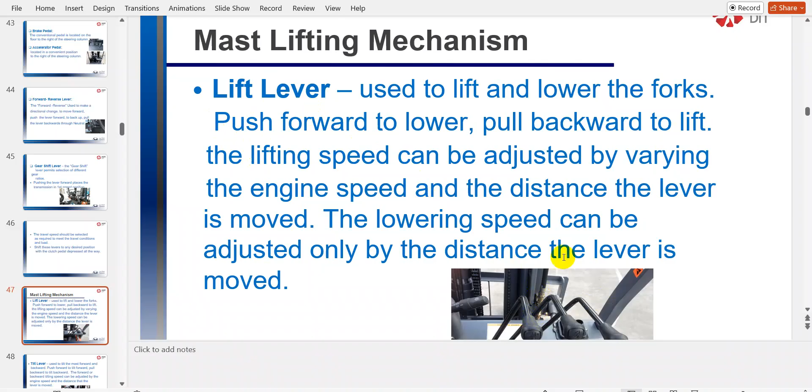Mast lifting mechanism, lift lever. They have lift levers, these are lift levers, and they lift the mast. Lift levers are those levers used to lift and lower the forks of the forklift. Push forward, and you push these levers forward, they lower the mast, and you push it back, it lifts the forks.

Now its speed depends on the length, on how much you push it forward or backward, depending on the distance from their mean point to forward and backward. When you push it forward too much, the speed will be higher, and if you push it slow to a lesser point, it will lower the speed.

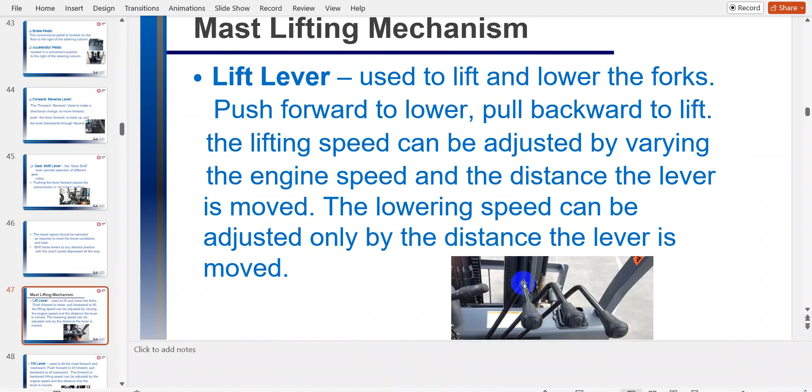Now, tilt lever. Tilt lever is the lever which is used to tilt the mast. It helps in smoothly and safely lifting and lowering the load. Tilt lever used to tilt the mast forward and backward. Push forward to tilt; when you push it forward, it tilts forward, and you push it backward, the mast tilts backward. It's also the same, depends on the speed, depends on the movement length.

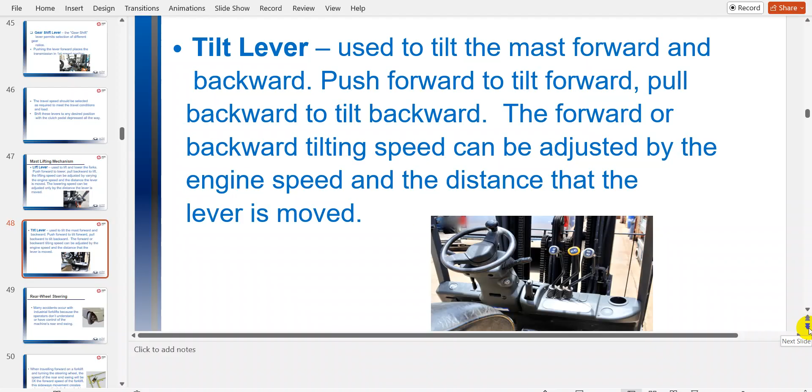Now, rear wheels. Rear wheels are steering wheels. Many accidents occur with industrial forklifts because operators don't understand or don't have control of the machine's rear end swing. Like in normal vehicles the front wheels are the steering wheels, but in forklifts these are the rear wheels. So many accidents also result because many operators don't understand or don't have any control over them.

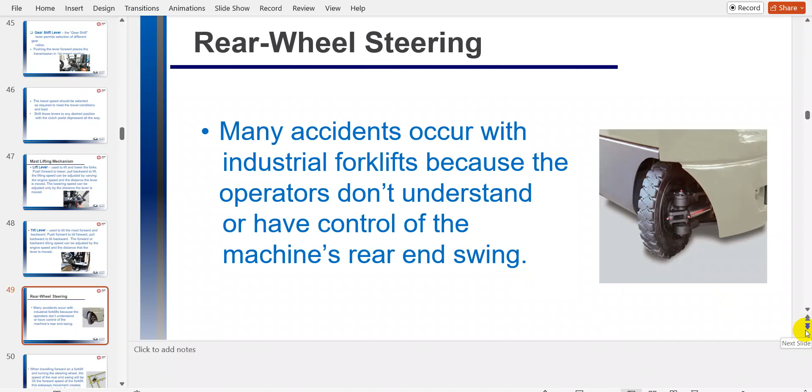Now when traveling forward on a forklift and turning the steering wheel, the speed of the rear end swing will be 3 times the forward speed of the forklift.

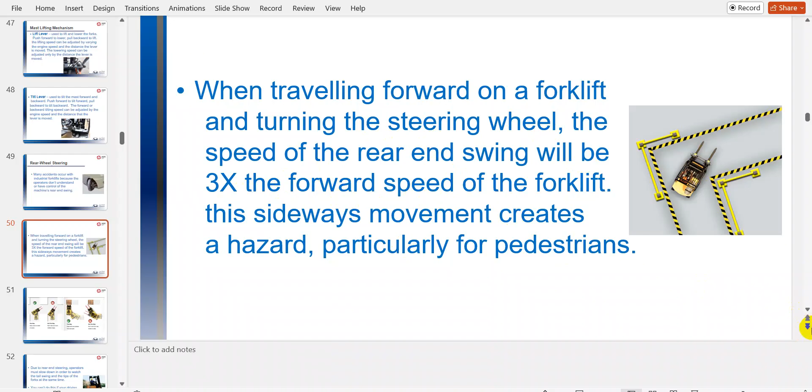Now these are the ways which are correct and which are not correct. So this way, when you keep this distance lower, it will move easily and safely. But if you just park like a normal vehicle in between, it will collide here.

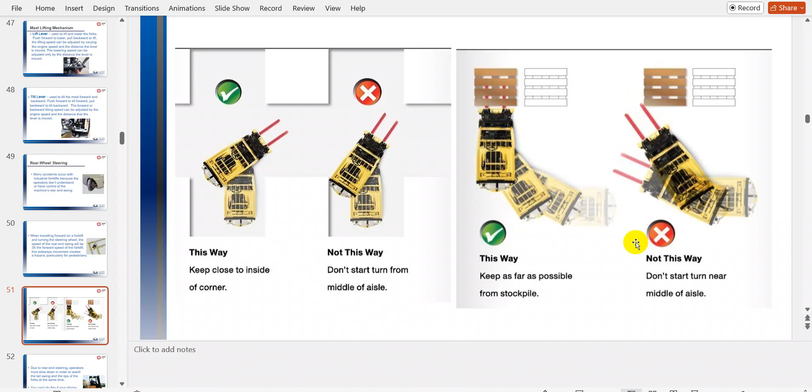Also, while lifting any pallet you have to be very careful. When you come closer to the pallet and want to lift it, it will collide here. But if you want to lift it safely, you have to balance the forklift with much distance, and then you just go straight and lift it easily. It will be safe for all of the mechanisms.

Due to rear end steering, the operator must slow down in order to watch the tail swing and the tips of the fork at the same time. Because the steering wheels are rear, you have to be very careful, and you have to just watch and must be slow before lifting or balancing the wheels and forks of the forklift. You can't do this if driving too fast, but if you are at fast speed, you can't do it at all times.

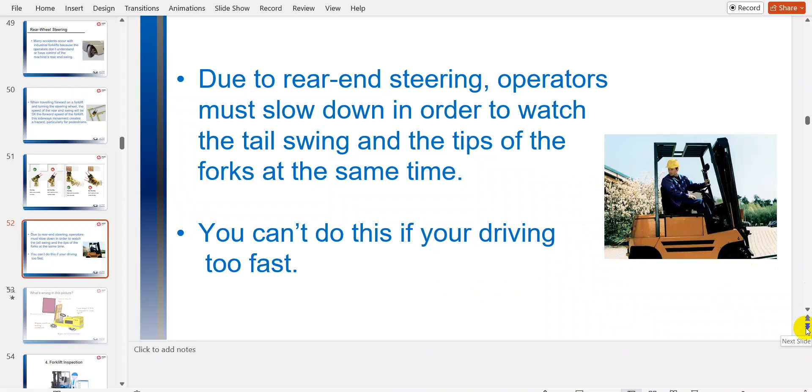Because you have two things to manage: you are balancing the forks and you are looking backward. But if you are slow, you can do it easily. If your speed is high, you'll make mistakes.

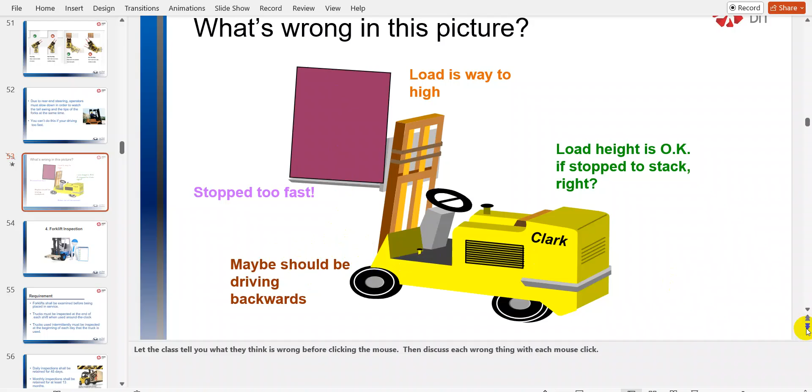Also, you have to slow down, and you have to keep this load lower to the earth here, so it will make an equilibrium, it will make a balance, and it will protect the forklift from lifting or flipping.

Now, forklift inspection, the 4 point - we will inspect.

How will we inspect the forklift? It's a very important thing. As an operator, you have to inspect it. The forklift shall be examined before being placed in service. When you want to place the forklift in service and work in it, you have to examine it before.

The truck must be inspected at the end of each shift. While in each shift, you have to inspect it, when the shift changes - day shift and night shift, etc.

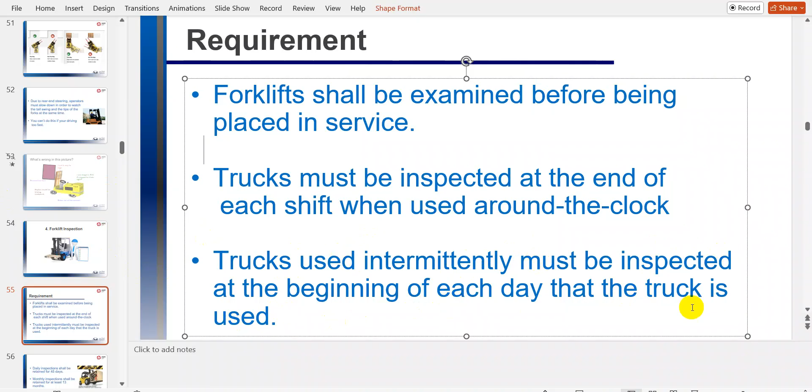Truck used intermittently must be inspected at the beginning of each day the truck is used. When the truck is used, you have to check it daily. Daily inspection records shall be retained for 45 days - that's 1.5 months. Monthly inspection records shall be retained for at least 13 months.

Here are some checks: inspect the forklift before operating. Operate a forklift only if you are trained to do so. Drive slowly and never raise or lower a load while moving.

While you are moving, don't move the forks up and down - keep it lower. Never raise or lower a load while moving. Don't carry anything on the overhead guard, and stop at all intersections and sound the horn, to be safe and keep others safe.

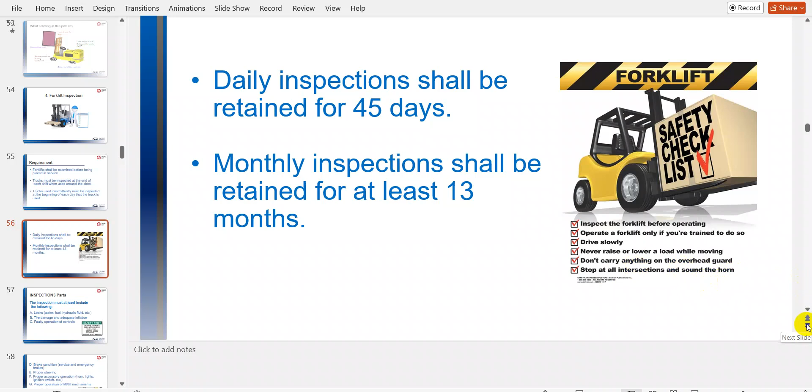Inspection part: the inspections must at least include the following - leaks. You have to check leaks in inspection, including water leakage, fuel leakage, hydraulic leakage, etc.

Second, tire damage - you have to check whether the tires are damaged or okay, and check adequate inflation. Now, faulty operation of controls - you have to check for faulty operation and controls.

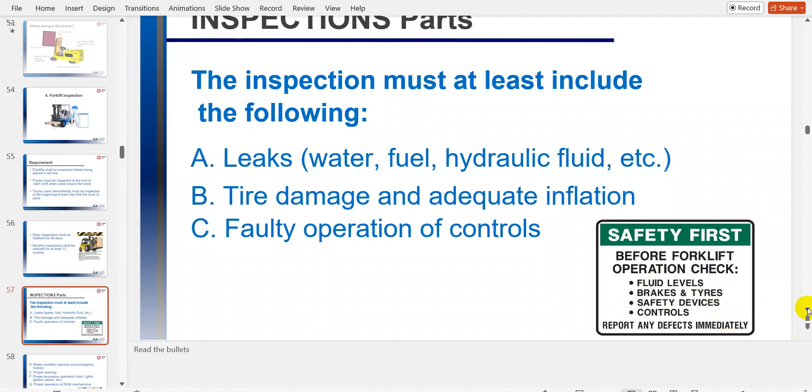Safety first. Before forklift operation, check fluid levels, brakes and tires, safety devices, and controls. Report any defects immediately - if there is any defect, you have to immediately report it.

You have to check brake condition, whether the service and emergency brakes are properly working or not - you have to check both brakes. Also check proper steering - whether the forklift steers properly or if there is any fault in the steering wheel or steering operation. Check proper accessory operations like horn, lights, ignition switch, etc.

Check proper operation of lift and tilt mechanism. You have to check the forks, the hydraulic system, and the tilt of the mast - whether it's working or not.

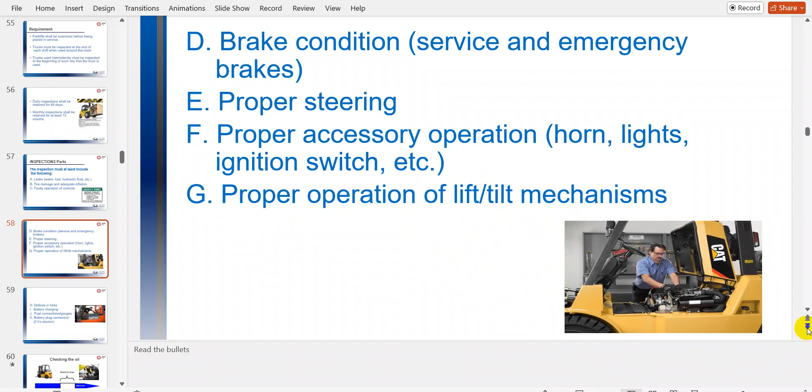If there is a defect in the forks, you have to check it. Also check battery charging, fuel connection, gauges, and battery plug connection - if it's electric, you have to check it.

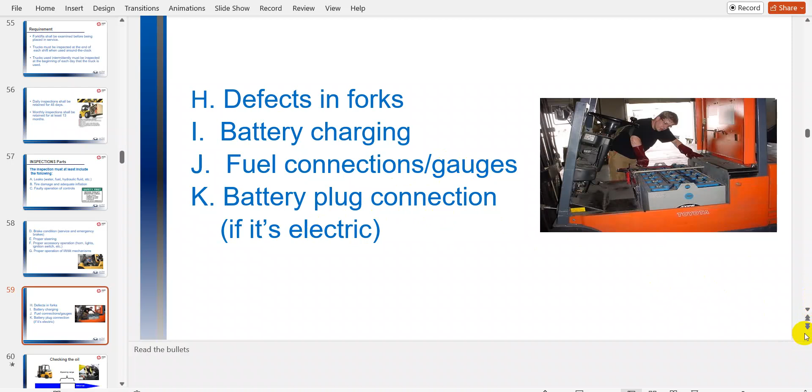Inspection also includes oil ranges. I admit this is kind of elementary to bring up, but people will overfill the crankcase and the truck, and it will cause a slip hazard. From low to full could be 1 quart to 1 gallon.

Put a little in, check the level, keep doing that. Do not overfill - do not overfill the tank.

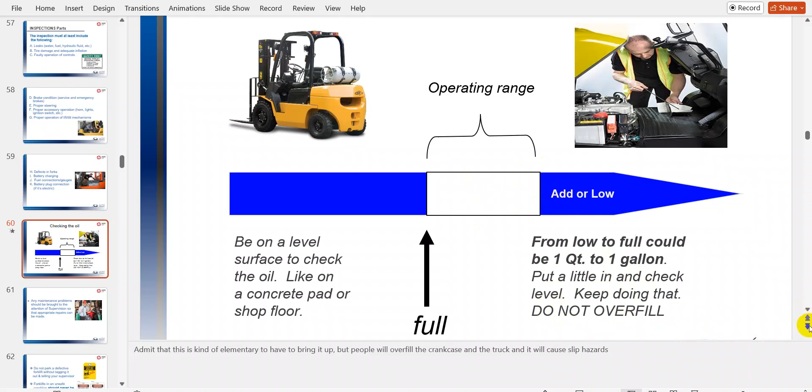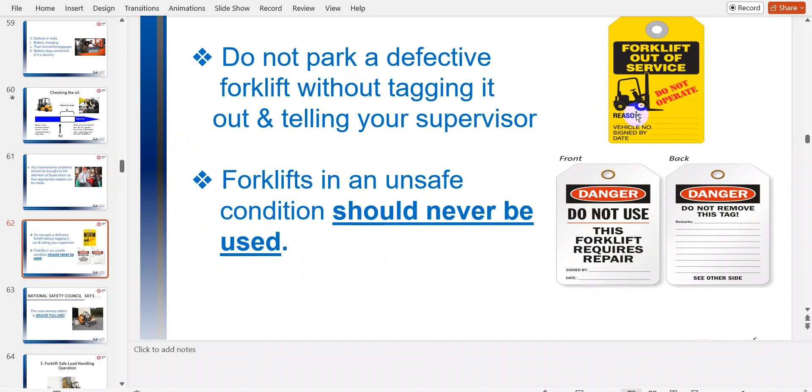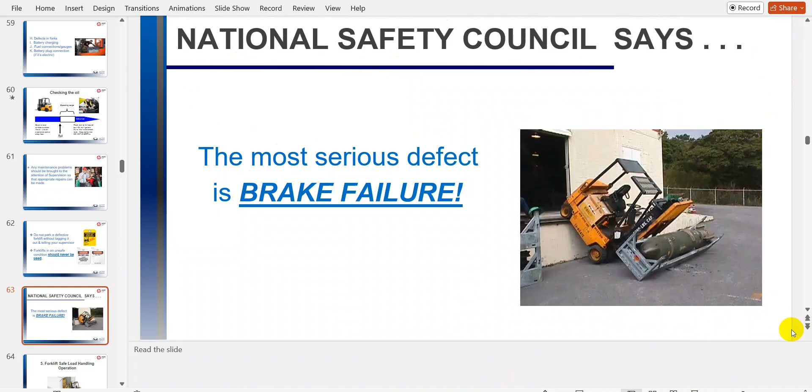These are cards which are used for faulty forklifts. The most serious defect is brake failure - most accidents occur due to brake failure. If there is brake failure, it can cause accidents, as the National Safety Council also states. Now, number five is forklift safe load handling operation.

Now we will check how safely we will lift the loads. Don't travel with the raised load. As I told you before, it's a rule for forklift safety. Do not travel, do not move with a raised load, because it unstabilizes the stability and center of gravity of the forklift and causes accidents.

A forklift with a raised load tends to be very unstable, especially with the load near the forklift's lifting capacity if the load weight is high. So as soon as the load is picked off the upper shelf in this photo, the load should be lowered before traveling or moving forward or backward.

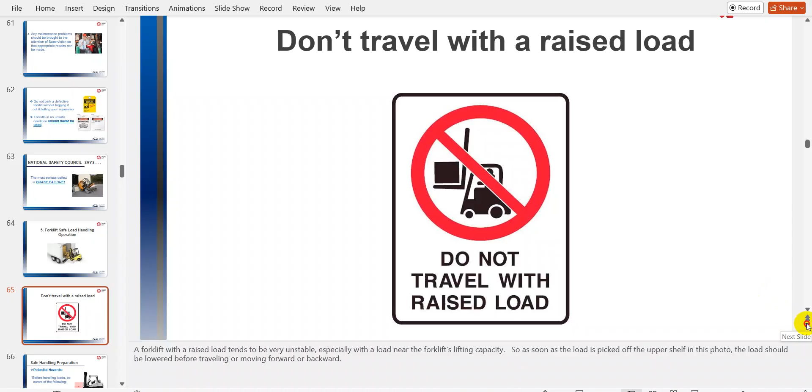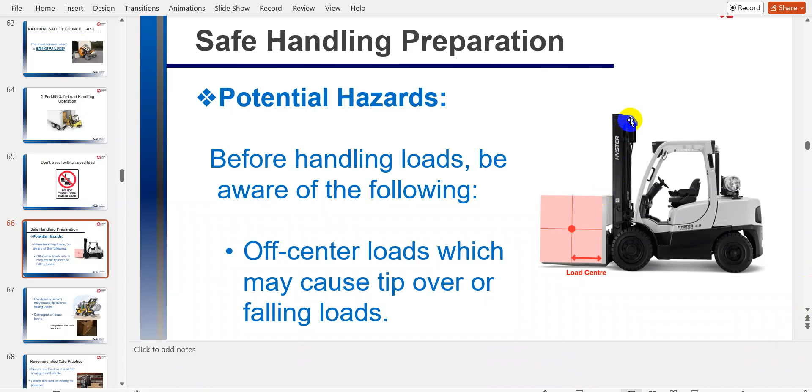So you have to be very careful. You just have to tilt a bit backward the mast and counterbalance the load. Overloading may cause tip over or falling loads. These are the hazards: damaged or loose loads - loads which are damaged and loosely tightened.

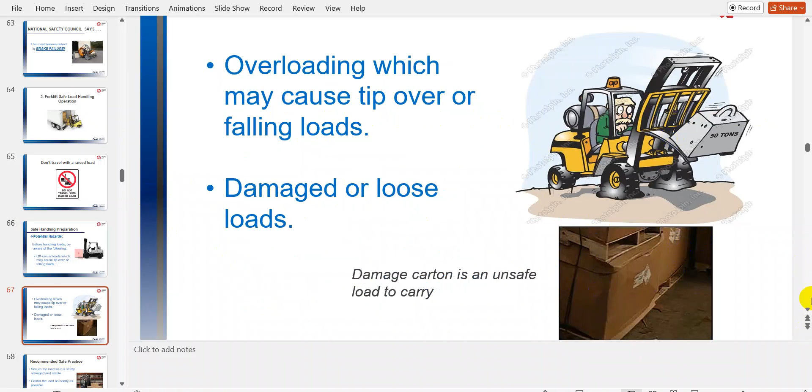Recommended safe practices are: secure the load so it is safely arranged and stable. Center the loads as nearly as possible. Use caution when handling off-center loads that cannot be centered. If the load is off-center, square shaped from all sides, improperly distributed or oversized, it may exceed the capacity and unbalance, and improperly distributed loads may tip over the forklift.

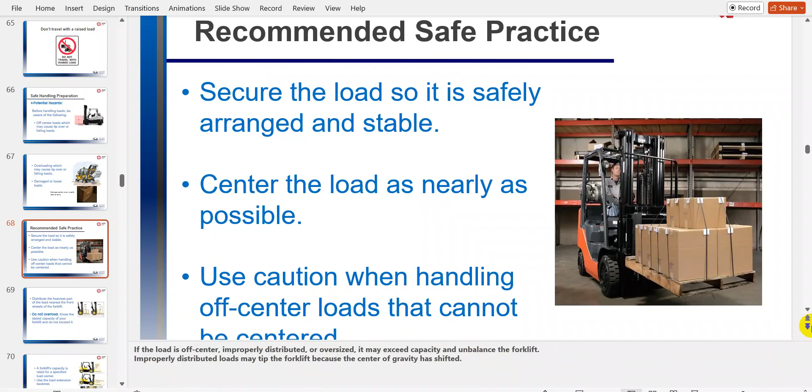Distribute the heaviest part of the load nearest to the front. This is right and this is wrong, because it has the hazard that the load may fall. So you have to be very careful about that.

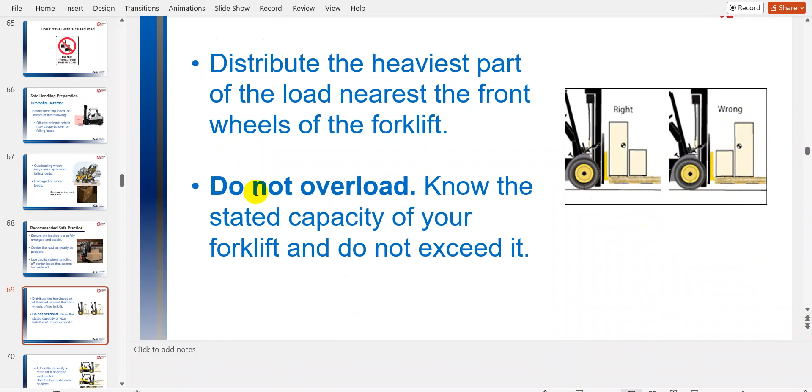Do not overload the forklift. Do not overload. The basic safety rule: a forklift's capacity is rated for the specified load center.

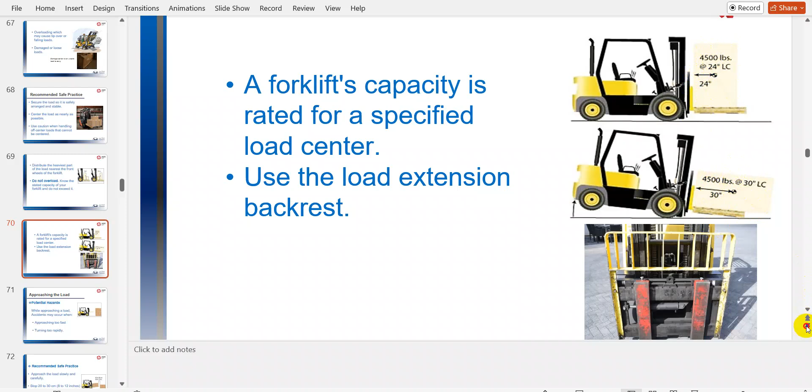Approaching the load - when you are approaching the load, an accident may occur. So when approaching the load, you must slow the speed. If the speed is high, it will cause an accident. Turning too rapidly - when you are turning sideways, you must be very slow so the operation will be safe. Improperly distributed loads may tip the forklift because the center of gravity has shifted.

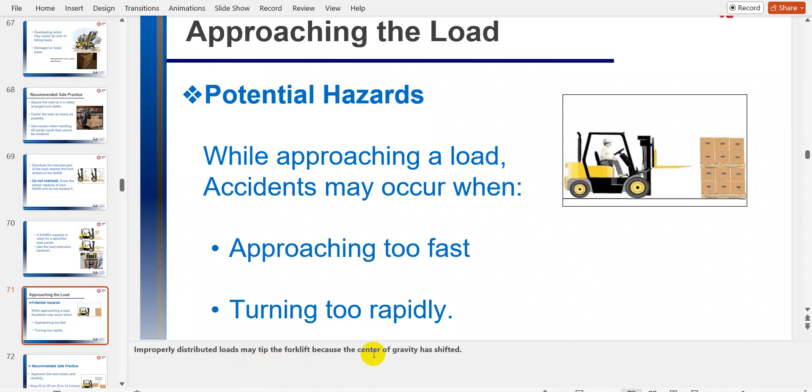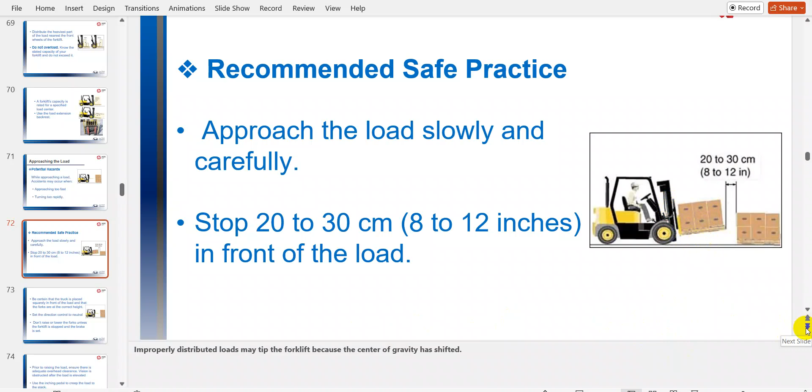Recommended safe practices are: slowly reach the load. Also stop 20 to 30 centimeters before the load, or 8 to 12 inches in front of the load, and slowly lift it. Slowly tilt the mast so it will safely lift the load without any accident. Be sure that the truck is placed squarely in front of the load and that the forks are at the correct height. Be sure these forks are in proper condition.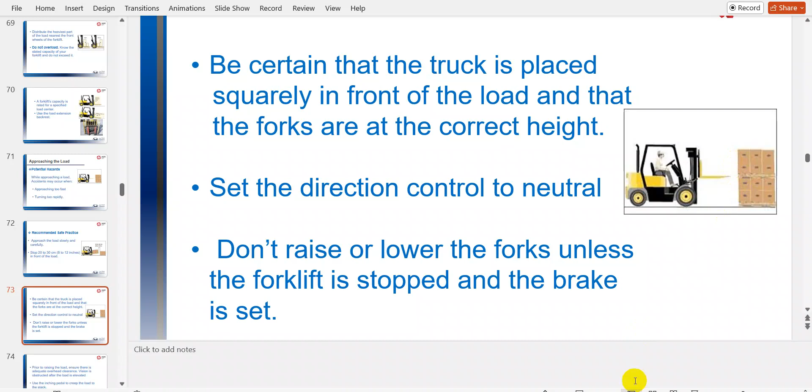If you let it be above or below, it will cause harm to the forks and also to the load we are lifting. Set the direction control to neutral. Don't raise or lower the fork unless the forklift has stopped and the brakes are set. These are the conditions regarding lifting these forklifts safely.

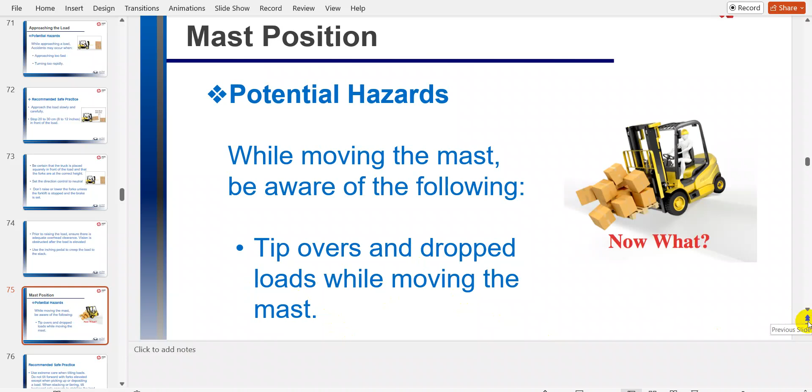Mast position must be level while you are lifting. Potential hazards: while moving the mast, be aware of tip over or dropped loads. While you have the load in the forks and you are moving or shifting the mast, it may just fall, which is the hazard that the load will fall.

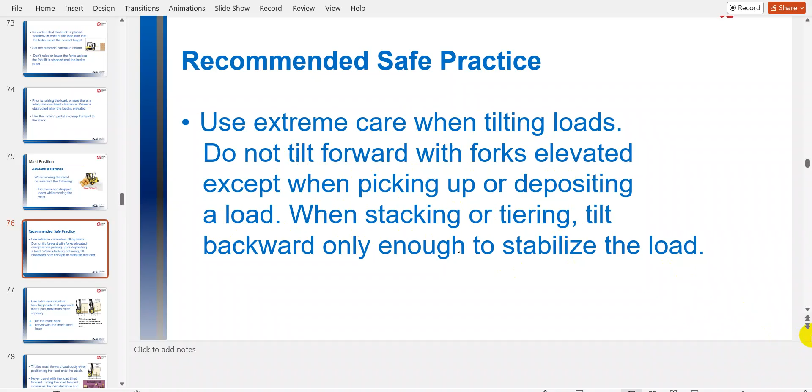Recommended safe practices are: use extreme care when tilting loads. Do not tilt forward when forks are elevated, except when picking up or depositing a load. When stacking or tiering, tilt backward only enough to stabilize the load. These are all the conditions we have to be very careful about.

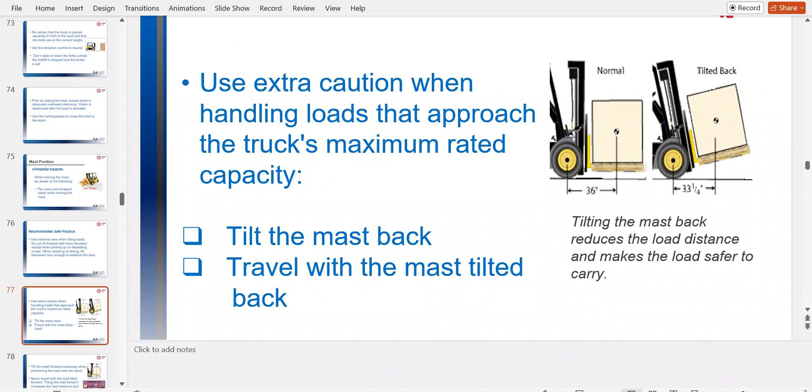Use extra caution when handling loads that approach the truck's maximum rated capacity. Tilt the mast back, travel with the mast tilted back - this is tilted back so the load will not fall. If it's normal, it may fall. Okay, these are all about the safety regarding forklift operations.